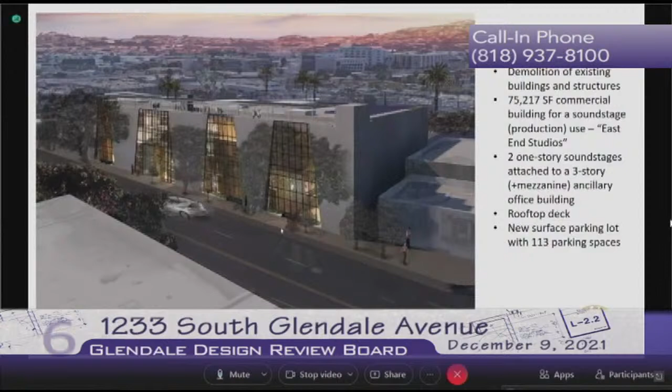Okay, can everyone see my screen? Yes. All right, good evening and thank you. This is Design Review Case Number PDR 2117731 for the project site located at 1233 South Glendale Avenue. The proposal is to demolish the existing buildings and structures on site and build an approximately 75,000 square foot commercial building for a soundstage production use. The owner's intent is to redevelop the project site to suit the needs of the existing operator, East End Studios, and to unify all of the current operations into one building.

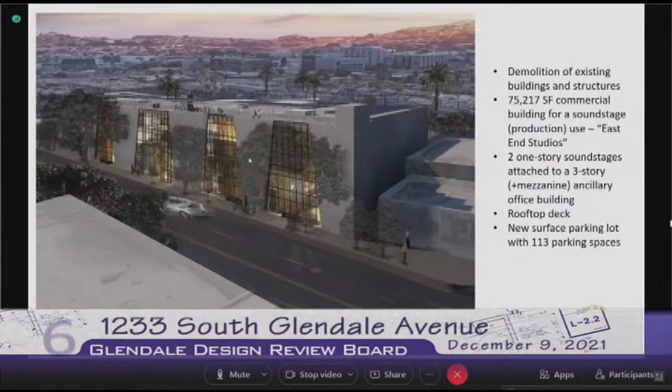The project includes 2 one-story sound stages, an attached 3-story and mezzanine ancillary office building with a rooftop deck, and a new surface parking lot with 113 parking spaces. The project site is approximately 2.2 acres with frontage on 2 streets, South Glendale Avenue and South Maryland Avenue.

The site is split zoned. The easterly half facing South Glendale is located in the C3 Height District 1 zone, and the westerly half facing South Maryland is zoned R2250 with a parking overlay.

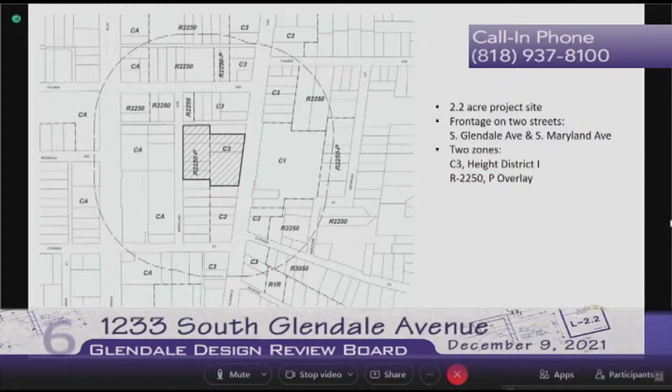East End Studios has been operating at this location since December 2020, and the site has been used as a soundstage production use with offices since 1986. Currently, there are 7 buildings on site along the westerly half that will be demolished, including 2 Craftsman-era buildings. None of the buildings are considered a historic resource. The property currently has 96 parking spaces that serve the operation, with vehicular access taken from 2 driveways along South Glendale Avenue.

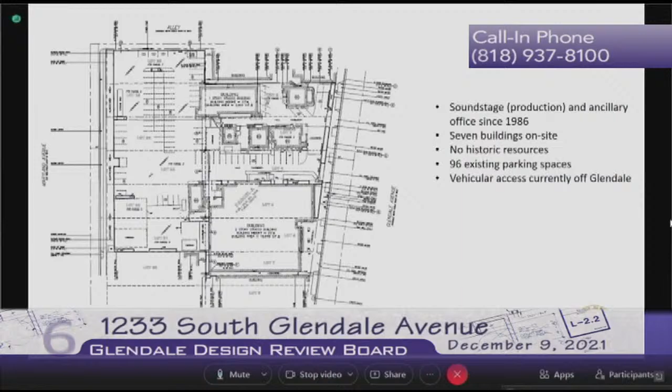By way of background, as it relates to development of this project, in September the planning hearing officer approved multiple variance requests related to the required setbacks, landscaping, required masonry wall buffers, height, and the trash collection area. They also approved a parking reduction permit to allow 113 parking spaces where 119 are required, and 2 loading spaces where 5 are required.

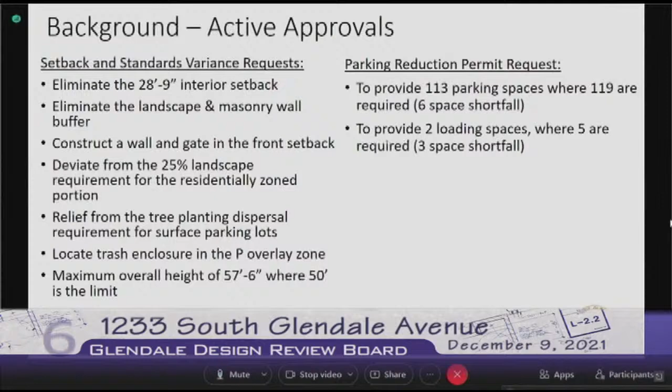The surrounding area is a mix of commercial and residential uses, with a fire station located to the north on Palmer Avenue. Directly across South Maryland and to the west, there's a vehicle inventory lot for one of the nearby dealers on the South Brand Boulevard of Cars.

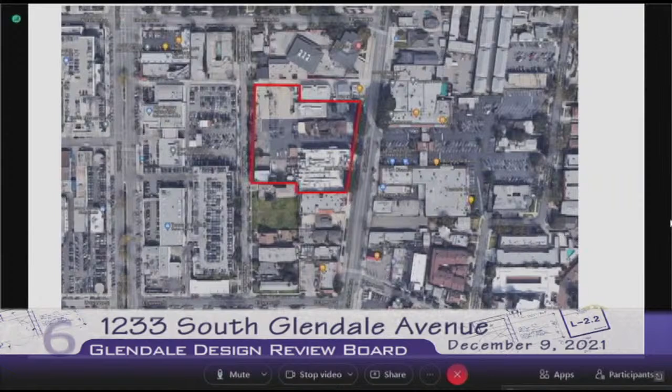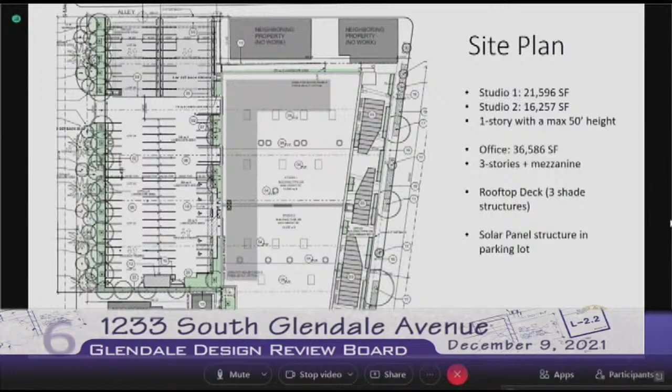The new building is sited on the commercially zoned portion of the site, with the building located at the front property line and pockets of landscape planters at the ground floor along South Glendale that will enhance the pedestrian experience.

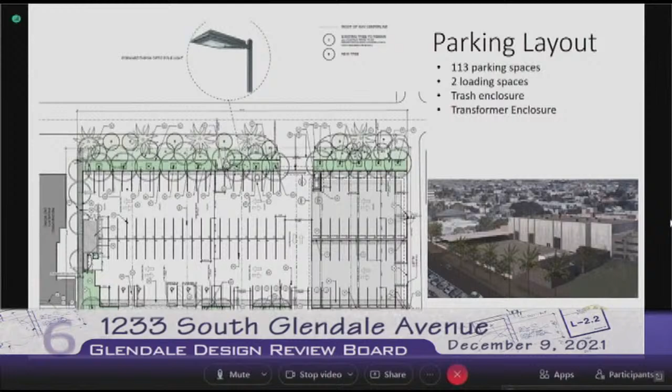The updated parking lot is proposed on the western portion of the site in the parking overlay zone and includes a solar panel structure along the northerly portion. Vehicular access to the site will be from a new driveway along South Maryland, and the existing driveways on South Glendale will be closed, which will improve the pedestrian experience as well as traffic flow along the major thoroughfare.

A rooftop deck with shade structures is also proposed on the front portion of the building oriented towards South Glendale Avenue. The intent of this area is to provide a usable open space for employees and those conducting business on site. The development also includes landscaped areas throughout, including appropriate buffers along South Maryland Avenue. The new landscaping is appropriately sized and located, and it complements the overall building design.

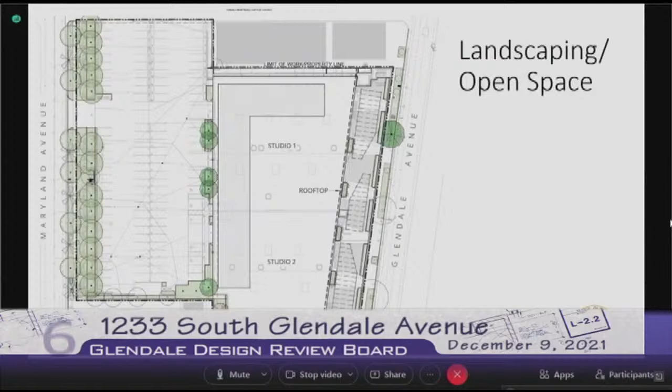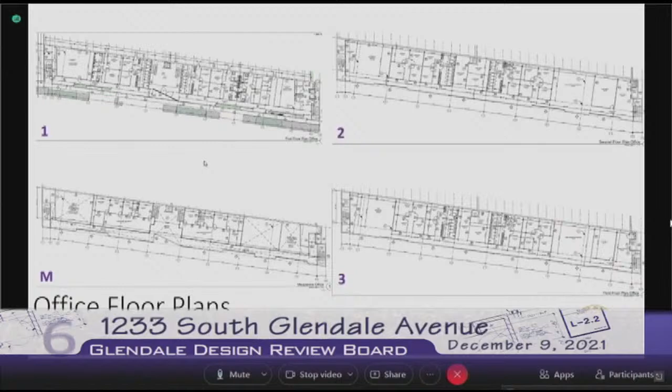Overall, the mass and scale of the design is appropriate. While the new building will be larger and taller than others in the immediate vicinity, South Glendale is quite varied in the size and setbacks of buildings in the blocks around the project site. The new building will add to this variety while also meeting the operational requirements and industry standards for production facilities.

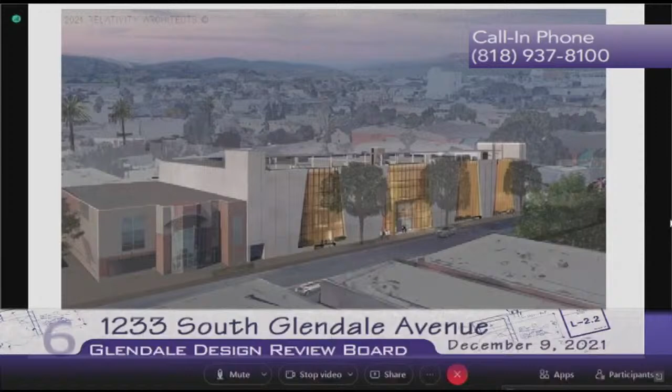At the Maryland frontage, the tall sound stages will be set back significantly from the street, and they also face primarily what are commercial automobile uses and mainly vehicle inventory storage parking.

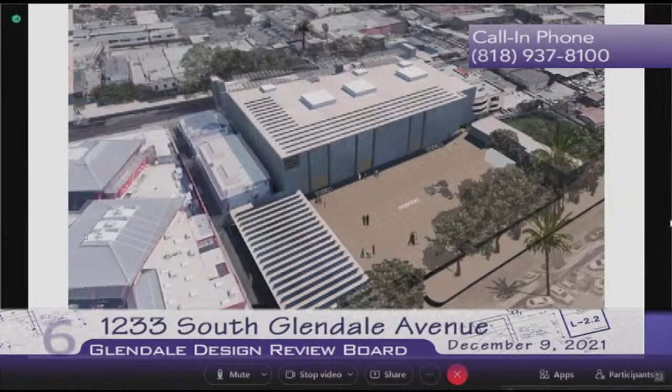The north and rear facades will be clad with fiber cement panels with a module size that will break up the mass of the wall surfaces. And at the south, the existing office building will largely screen the massing of that elevation, and that's shown in the drawing with that dashed line right there.

The Glendale Avenue facade will feature a series of small setback areas at the ground floor with built-in landscape planters and benches that help break up the building massing and provide a more human-scaled environment. The canted curtain wall elements help break up the mass, and they also provide visual interest on this frontage.

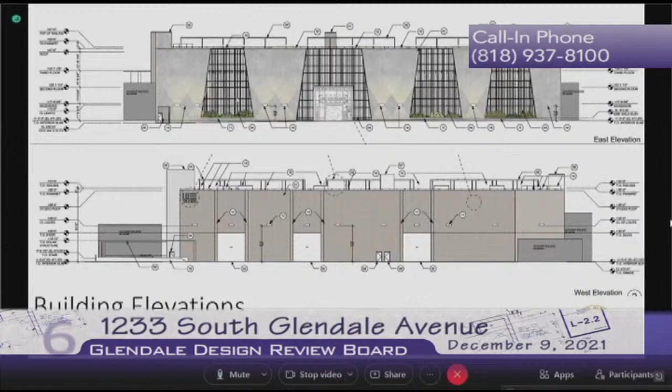This slide shows the building elevations facing both Glendale Avenue and South Maryland Avenue. Overall, the finished materials are of high quality and they reinforce the building's modern architectural concept.

The exterior finished materials consist of smooth finished concrete walls with grid patterned score lines on the South Glendale Avenue frontage, rectangular fiber cement paneling on the rear and north facade to visually break up the massing, in complementary dark and light gray colors. And the rooftop patio structures will be steel with perforated metal panels.

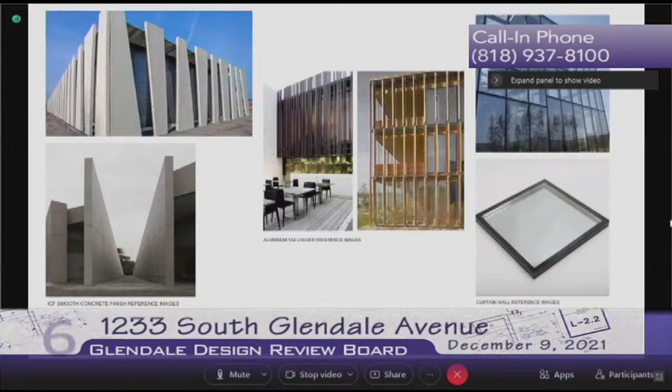The canted curtain walls, vertical louvers, and solid wedge-shaped wall sections on the Glendale facade will create a dynamic composition that will help enhance the appearance of this busy thoroughfare.

Staff has not received any public comments for this application. We are recommending approval of the project with no conditions and as proposed. That concludes my presentation, and I'm available for any questions. Thank you.

Mrs. Asadi, can you explain, and maybe this is a question for the applicant, but what's the mode of egress from the parking into the office building? Or is the office use only going to be used in conjunction with the studio, with the stages? This use will only be used in conjunction with the studio.

The applicant, as well as the owner, is here. He is the applicant as well as his project team, and they can clarify that probably better than I could. Okay, any other board members have questions for the applicant? For the staff?

Okay, let's go ahead and ask the applicant to make their presentation. Was there another question before? No, I was just going to comment and say most of my questions are probably better related being addressed by the applicant.

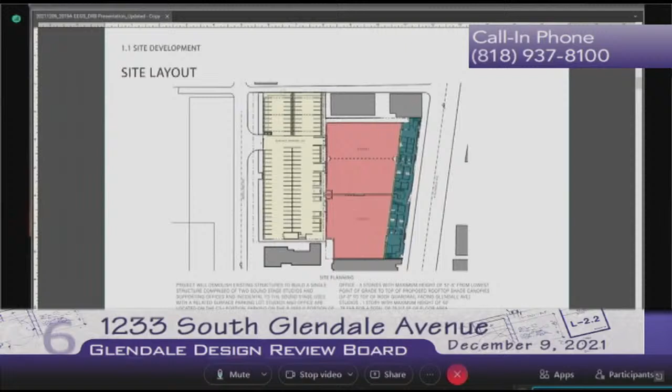The project itself, I think Vista pretty much clarified it. It is a motion picture studio. It does cover both sites, primarily because of the zoning and it being a split lot. We moved the building to the front side along Glendale and the parking to the rear along Maryland. That has proven to be a really great decision because it will keep quite a bit of vehicular traffic from turning from Glendale onto the property, providing most of it to go around the back, which is wonderful for the property and for the thoroughfare of Glendale itself, which is quite busy. Currently there's a driveway in, and I know that has caused problems in the past. You can go to the next one.

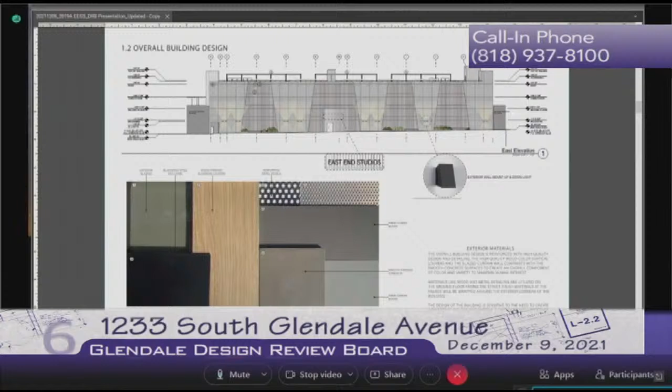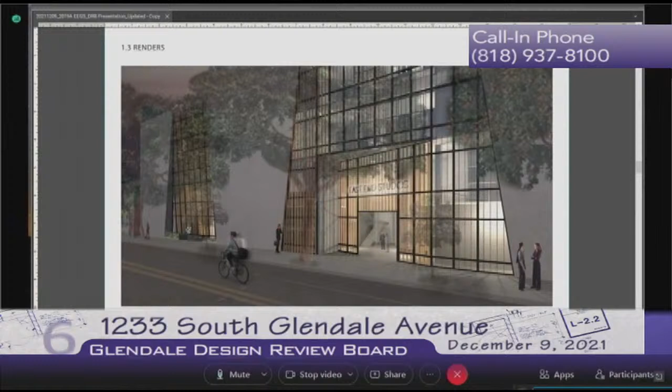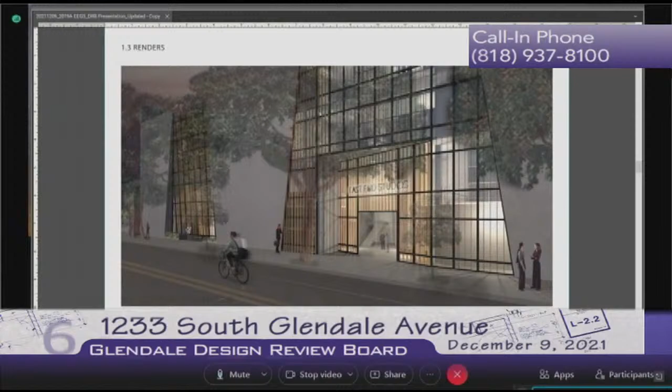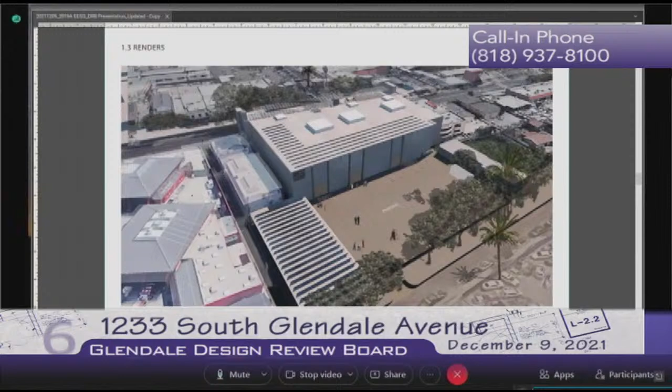As with any project of studio scale, parking is very important. Fitting the Tetris puzzle of getting all the parking to work was difficult, but we feel wonderful about what we've accomplished. We've also established solar for the project, which Relativity is very proud of, and I know the client is too, being able to use a renewable source of energy, especially given the direction California is pushing. These buildings are very difficult to include that in, so we were really happy to get as much as we could on the project.

The majority of the in and out will be taking place from the parking lot. There is both internal circulation as well as an external walkway leading to the front office of the building. But in truth, the use of the building is entirely insular. There will be no other use other than what supports the soundstage itself. No one's moving in as a permanent office on the ground floor with a different use or focus than support of filming or shooting in that production space.

Yeah, that is correct. And that's pretty much it. We're really proud of the project, and I appreciate Shep's direction. This is probably one of the best projects our office has come up with in a while. We've had other production companies take a look, and they're really excited about this building because it takes a studio to a different level. It's not just a big blank box, it's got some really nice articulation and visibility. We're really proud of it and proud to put it in Glendale.

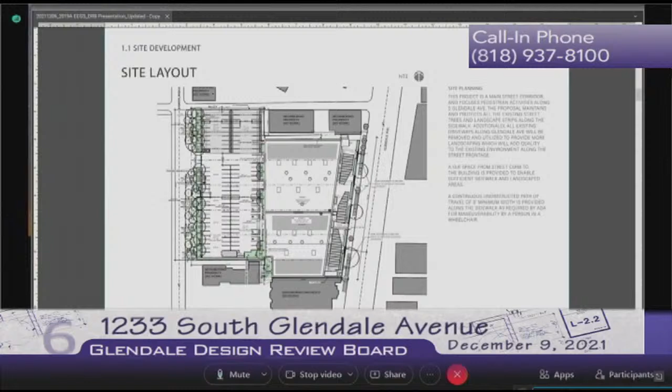Thank you. Does that conclude the applicant's presentation? Yes, it does.

Very good. Board Member Simoni, you wanted to raise some questions? Thank you, Chair. I have a few questions, and we'll start with the storefront details. I'm wondering if the design team or architect could hone in on the details of the storefront system as it relates to the material board.

Sure. Did you want us to share a screen and look a little closer at it, or talk about it? If staff is able to allow you to share your screen, I think that would be most helpful. Can you see what's up right now? Yes. So it is your typical setup. We intend to use Arcadia, a highly qualified storefront glazing system. It's broken up into larger and smaller panels. It's your typical 2-inch by 4-inch system with the glazing internally.

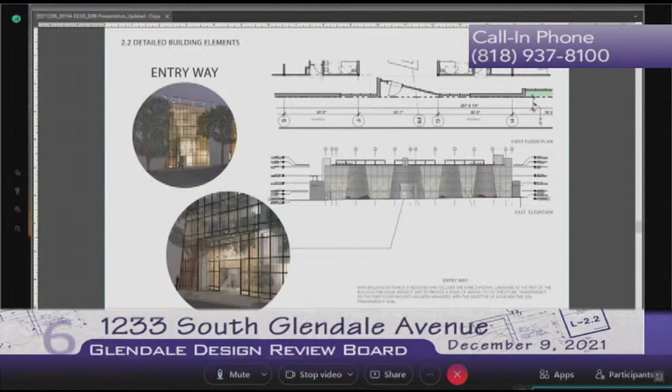What's important to understand is that both the entryway and the adjacent glazing that is not an entryway push back into the building, allowing about a 4-foot cavity at the facade, so that at pedestrian level you're not overwhelmed by the size of the building. It allows you to engage with the building, and we've actually designed a bench to sit there at staff's recommendation.

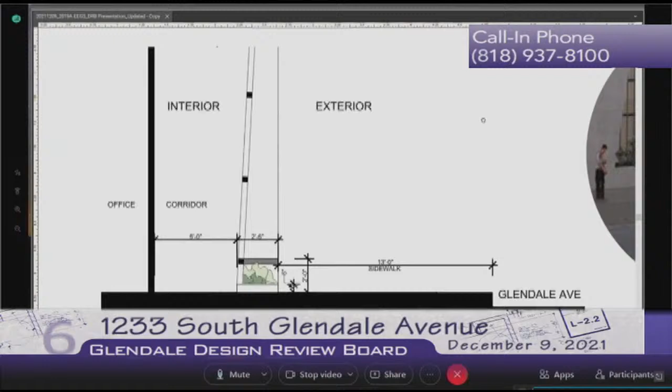Yeah, can you keep zooming in there? It's hard to see the detail because of the size of the building. Let's see. You can see we've got a sidewalk, and the glazing is canted in to allow for a 30-inch bench. There's actually an active corridor on the other side, so as a pedestrian could be walking on the sidewalk, someone could be walking down the corridor, and it projects the facade of the building back further so it doesn't loom overhead.

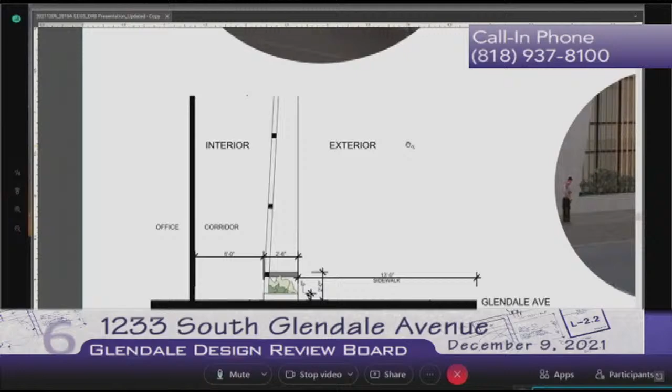If you don't mind scrolling up to the other picture and zooming in, maybe through this or the material board, I think it's important to note that we're combining materials here to soften it, so you have the glazing, which is the glass, and then the mullions, which will be in black steel or black aluminum.

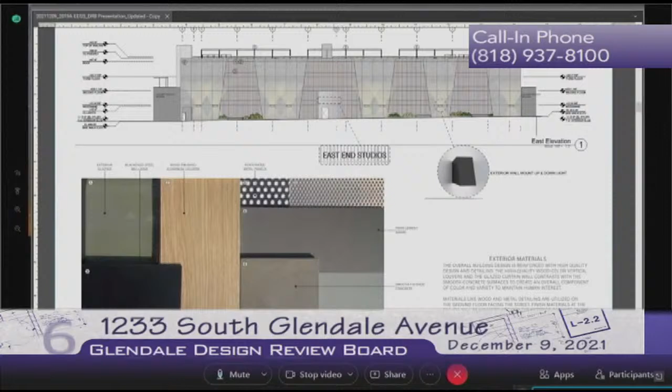But then we have these vertical wood slats, which break up the material and go up and down the building, to create a really nice design that breaks up the glass. So you have these vertical wooden slats, which are wood-finished aluminum louvers, versus the black, and they're kind of going in opposing directions.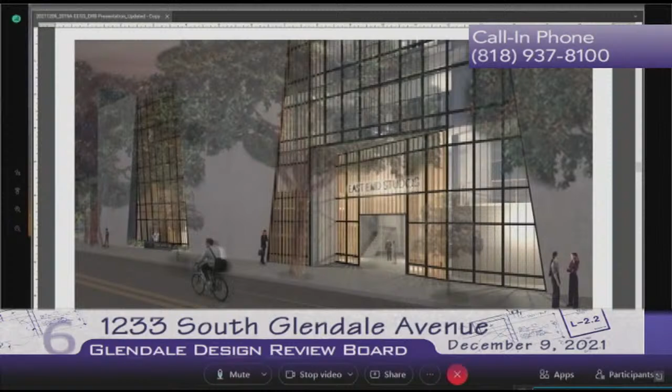And that was where I was kind of honing in on. So thank you for adding that additional color. Are those, it seems as though in what's being depicted on the screen at the moment, the vertical aluminum fins - let's say wood veneer, aluminum covered with a wood veneer material - how are they attached? In other words, how do they adhere to the storefront system?

Are they attached to the aluminum structure? Yes, they're internal, attached to the aluminum structure on the inside. I see, so they're clipped on in a way to the horizontal and vertical storefront aluminum system from the inside. That's correct. They add a modicum of privacy, and they warm the facade so it's not just glass, concrete, and black. They give a warmth to the facade.

And do you envision those being cut and inserted between the horizontal pieces, or do they run at length? They run at length - we don't anticipate putting in all those individual pieces, that would take forever. No, we see them running at length. The clips will be attached to the mullions, but the aluminum will be an extruded fin, as it were, with a wood finish that runs the length of the window, the glazing, top to bottom.

Thank you for that clarification. The second question I had is, looking through the package, I was trying to find an overall site section that takes me from, say, Glendale all the way to Maryland, but I couldn't find such a section. Does it exist in the package someplace? I'm not sure, I will have to look through. I don't believe so. Luis, Jenna, did we cut a section from Glendale to Maryland?

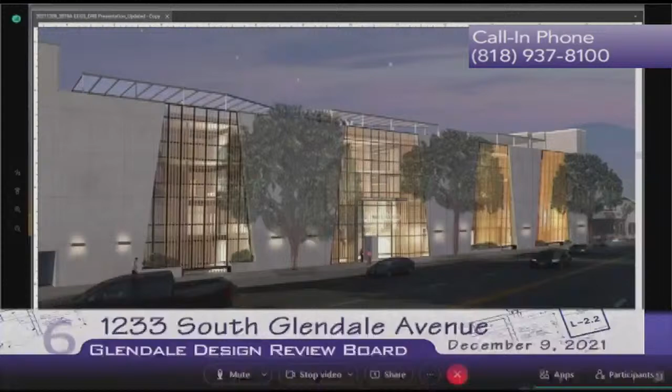So if I'm coming from the parking lot and I'm trying to enter the studios, where you have the arrows, are those where the entry doors are - the big elephant doors? Yeah, correct. So we will have three elephant doors where you can enter directly into the stages themselves from the parking lot.

And then on the northern side of the building, we have a walkway, which is an access point, so that in the event they were actually shooting a production and you needed to get to your office, that would be your primary method of getting into your office. So you go in there and enter the building on a side door from the parking lot. We also obviously have a front entrance for ride share or people who are coming.

Right, bicycles too. So if you Ubered or whatever to work, you could get out and walk right in - there'll be a reception on Glendale Avenue.

And I guess sheet 210 depicts the connection of the offices to the studios. And so there's really no corridor between those two uses - in a sense, those doors open into an internal corridor of the office space. Is that right? That's correct.

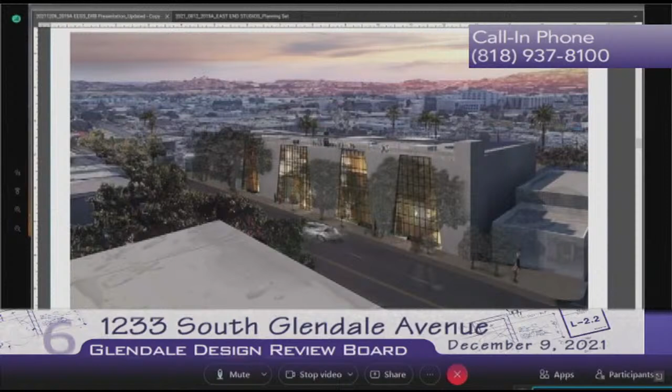The other question I had was about the landscape buffer system. When we look at the overall rendering, that's more in the beginning of the package. Would it be the front facade? No, I'm more concentrating on the back for now, the A023 sheet. Yeah, and there's another one as well, but that one's not accurate either. I would go to the actual site plan because that shows where we're actually doing the landscaping. That's what I'm getting at, and the rendering doesn't show it.

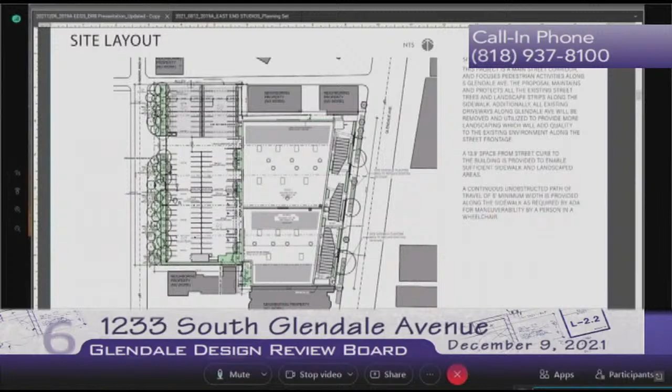How are we buffering this very tall building from Maryland, and how is landscaping integrated into that scheme?

So we have the whole edge along Maryland currently landscaped, but we anticipate adding more trees and hedges. The reality of a studio is we prefer not to have a lot of interaction with someone who's not working there. Privacy is of great concern for content creation these days, so it behooves us to add a natural buffer along Maryland to give some sense of privacy to our property as well as to Maryland, so that the busyness of the parking lot or the studios themselves doesn't pour over into each other.

So you can see it's a lot of circles—those are either newly planted or existing trees. There is a very strong buffer of landscape between the property and Maryland. In addition, the building is set back 150 feet from Maryland, so it's not hovering over it. If you take the hypotenuse of that triangle, the building ends up feeling like it's something like 30 feet tall from that distance. It doesn't loom over the site.

And to add to that, we are providing 20 new trees with at least 25-foot tall canopies along Maryland. That was a question as well—what size specimens? The ones along Maryland are fully grown 25-foot specimens. That's correct.

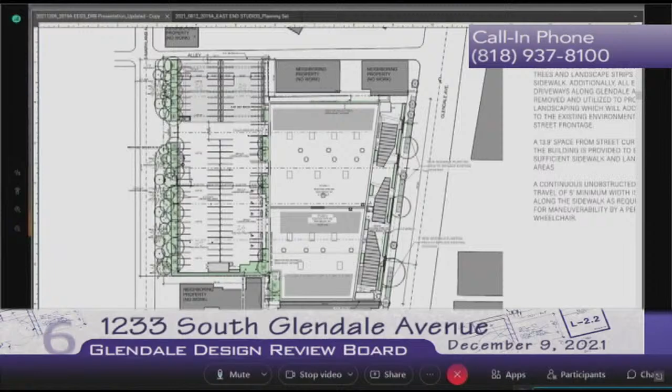And the glass facade as it approaches Glendale - the renderings really show it well lit up. Will it be lit up at night? I mean, the soundstage is pretty much a daytime operation, not so much nighttime.

But will the lighting be there? Well, we can't dictate when a potential tenant will be operating, but we will have exterior lighting on the building, which will light the sidewalk 24 hours a day. As far as what happens behind the scenes, it really just depends on what production they're filming at that particular time - sometimes they'll work long hours, sometimes they'll be out at 5 o'clock. But in general, in this industry, there will always be someone there working.

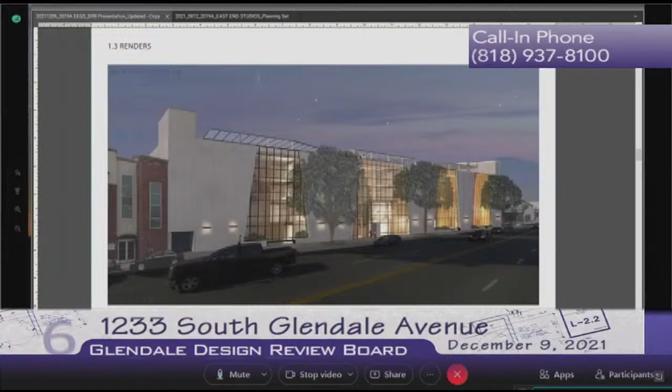And we do have Title 24 concerns - we're not allowed to necessarily keep a building lit all night long. We have limitations about what the allowance is. I would hazard a guess that along with the lighting on the facade of the building, the lobby would be consistently lit - perhaps not the offices on the second and third floor.

I asked because it's a very narrow sidewalk, and the tree cover that's there is pretty pervasive, so it could have a tendency to be quite dark.

Any other questions? Go ahead, Mr. Simoni. I think Mr. Mina's had his hand up first. Oh, okay, I can't see him on my screen.

Sorry, thank you Mr. Chair, and thank you for the staff report. Going back to the facade of the building and having so much glass in an inclined manner, you're compromising - again, I'm not an architect, but I'm an engineer - that's compromising a lot of shear walls along the front. Again, it might be a building and safety issue, but do you think this tall of a glass in an inclined manner...

...be safe during a strong ground motion earthquake? I mean, I'm sure it was addressed by the structural engineer, but having so much glass, you're compromising the highly needed shear walls for this part of the country.

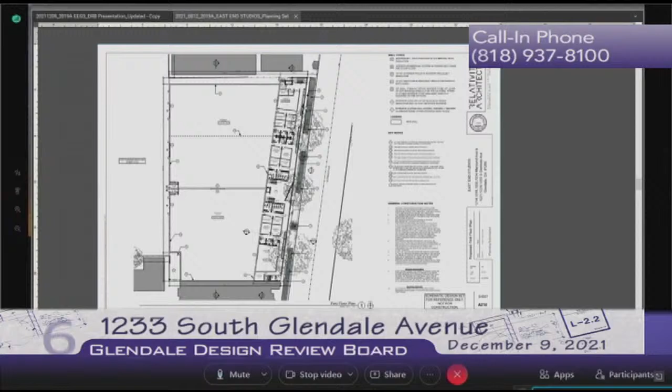There's a nice diagram that depicts a pre-finished Logix concrete wall system. The architect did mention that the sound stages were going to be poured in place concrete. I'm wondering, is this poured in place concrete? Is that what we're talking about? Now you're asking questions that I'm going to love to answer.

The building is constructed of a material called an ICF block, an insulated concrete form. It's a different way of using poured in place concrete. Instead of hiring carpenters to build formwork that gets used and thrown away, there's a company that produces styrofoam blocks. They get stacked like Legos, and they're pre-built to hold rebar, so the rebar lays in both horizontally and vertically.

You pour it in 8-foot lifts, and the recycled styrofoam adds a level of temperature and sound mitigation for the building naturally. In addition, the styrofoam is designed to have a plastic reinforcement every 16 inches on center, equal to a 2x4 stud.

So we're able to put sleepers on the exterior wall and then mount our finished cementitious panel on the outside. On the inside, not a lot of finish is required, so we basically screw our insul quilt, the sound mitigation insulation, directly to the styrofoam. It makes a wonderful building section: rain screen, cementitious panel, sleeper, 2 inches of styrofoam, 12 inches of concrete, 2 inches of styrofoam, and then the insulated blanket.

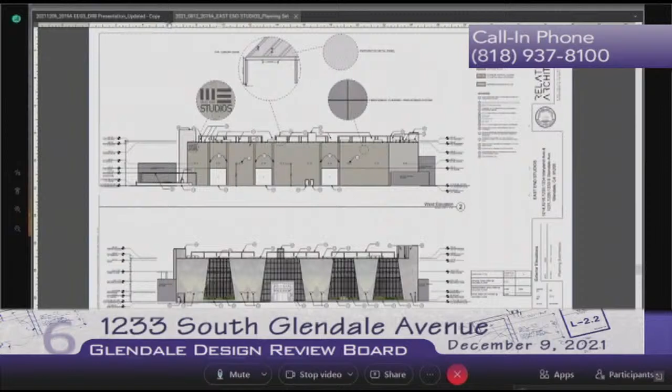Oh, those are the towers, the towers. Is that right? Is that what you're indicating? There's an opportunity to create end pieces, to frame it, to have maybe a different finish. But I was wondering what your thoughts are on that.

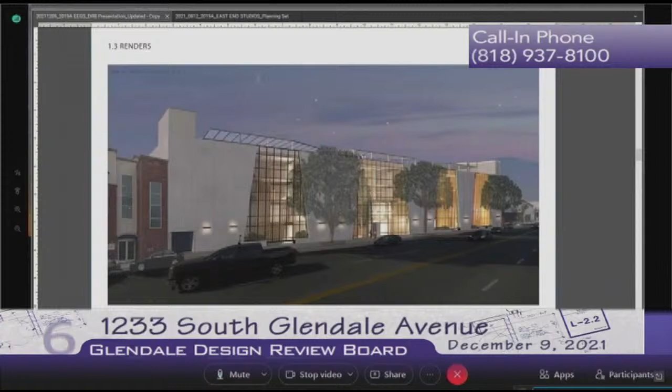I mean, I feel like I'm a bit of a purist when it comes to concrete, and hanging or attaching things or shifting the material, I feel, would in this case take away from the massing of the building and the gentle articulation of the angles. Those end pieces are staircase towers, obviously, as we've understood, and an elevator, so they are functional to some degree. I think highlighting them might not blend with the consistency we have on the rest of the structure.

The concrete panels on the facade are sand-finished plaster over the top, so we're putting a finish over that concrete to get something of a, maybe a Tadao Ando kind of soft feel to the concrete, which is not always achievable, but I believe because of our angles and the type of mixture we're going to provide, we're going to get that. So I think dressing up those two little corner elements would detract from the clean uniformity of the concrete we've provided.

That's the architectural intent. I think primarily, if anything, we're trying to just keep it somewhat uniform and not necessarily draw the eye to those areas, as opposed to what we think are the more creative aspects of the front of the building, which really revolve around the glass storefronts and the play between the glass storefronts and those vertical louvers.

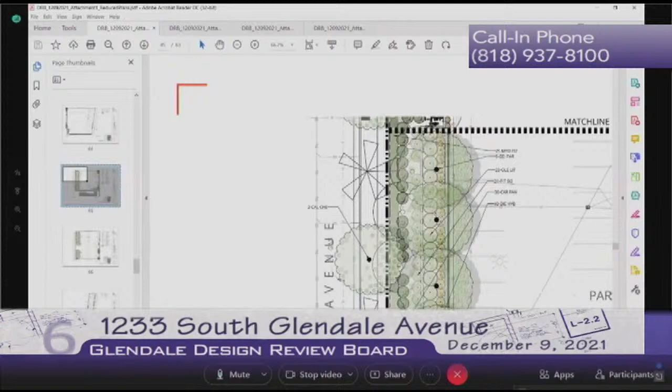Sorry, I don't normally use this computer, so just bear with me.

So this is the area in question, I believe, and I think it looks like a single family, but I think it's like a 2 or 3 unit building. From what I remember, I believe there's a unit up here, and below is a garage. This area here has existing trees that will remain. I believe the wall here will be about 6 feet tall and a solid CMU wall in this area.

And then I believe these are going to be rosemary bushes. I think we can get taller landscaping in there. I am concerned about increasing the size of the planter and the impact that could have on both the transformer, the easement, as well as the parking.

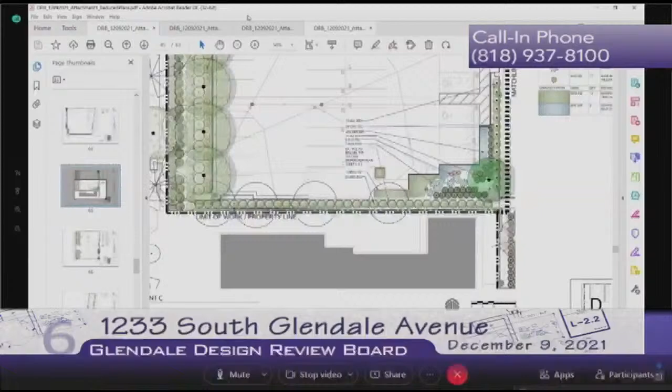Well, thank you for that additional detail. For starters, rosemary is not the appropriate material there for screening. I would not suggest a ficus or anything like that because it's intrusive. However, something like a ligustrum, you could certainly get 14 feet out of a ligustrum bush, and that's not going to take a lot of room. So if there are ligustrums spaced 2 feet on center, adequately spaced, that would get some height, or some other hedge-like specimen that the landscape team comes up with. But those are things that, as Mr. Platt brought up, to work with the design studio team to see what's a logical solution without going through a ton of heartache here.

Okay, yeah, no, that's fine. I just wanted to make sure I understood too. So thank you very much.

I'd like to make a motion, Mr. Chair, if that's all right. I move to approve the project with 2 conditions. Condition number 1: staff to work with the architectural and landscape team to create an appropriate buffer via suitable landscaping to provide a buffer between the parking lot and the existing single-family residence, which could also integrate an appropriate CMU fence, etc. The second condition would be for the design team to provide several quick sketches regarding the corner elements of the Glendale facade, and to collaborate with staff to see if there's a better solution.

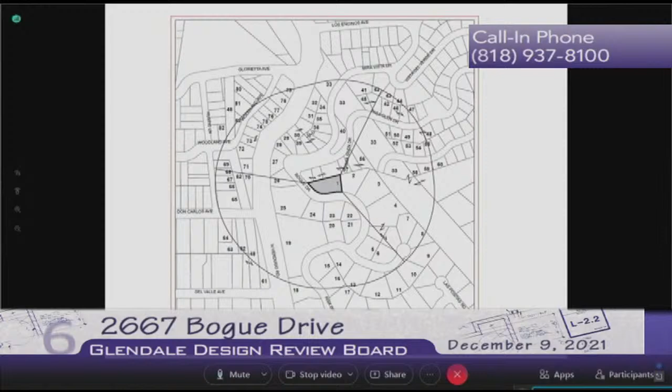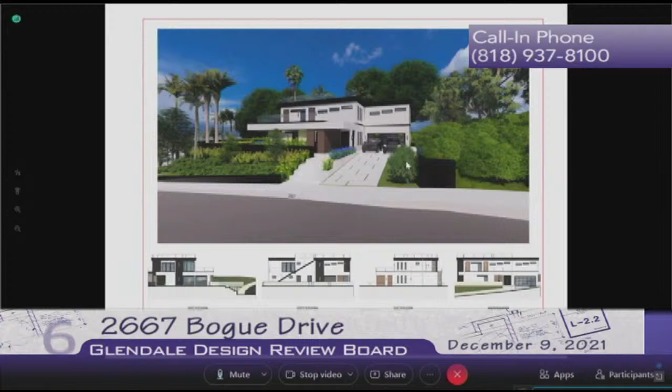Looking at the perspective of the proposal, this is a rendering. We'll go more in detail in a little bit. So the driveway location will be the same, leading to a two-car garage attached to the house. The property will be developed around it. The landscaping on the slope will be updated. There are some elevations shown at the bottom. We'll get to those in a moment on a larger scale drawing.

Here's the site plan. The property starts sloping up, then it levels out. There's another slope to the back here, leading to the neighboring property to the north. The oak trees are located on the property to the north. There are 3 of them.

The applicant has submitted an arborist report. The arborist report supports the project in terms of preservation of oak trees. The forestry division has also reviewed that report and concurs with the determination.

Moving on, this is a more detailed site plan showing also the footprint of the building, the footprint of the first story, and the footprint of the second story.

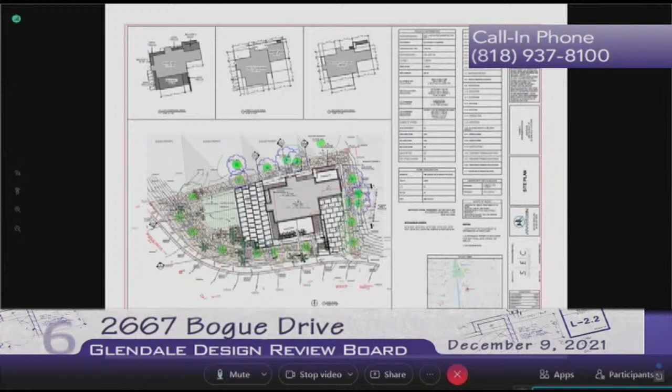Coming to the elevations, below is the front elevation of the house facing Bogue Drive. As you know, Bogue Drive curves around, so this is the long front elevation leading to the garage, 2 levels. There's going to be an outdoor balcony or porch. The roof of the front will be used as the balcony or deck of the second level. There are other deck levels that I'll point out, one of which is the rooftop.

This is the rear elevation. Rooftop deck is shown with a glass parapet here. The other elevations, the other 2 elevations, below is the elevation facing Bogue Drive towards the west. And the upper elevation is the elevation facing the property to the east.

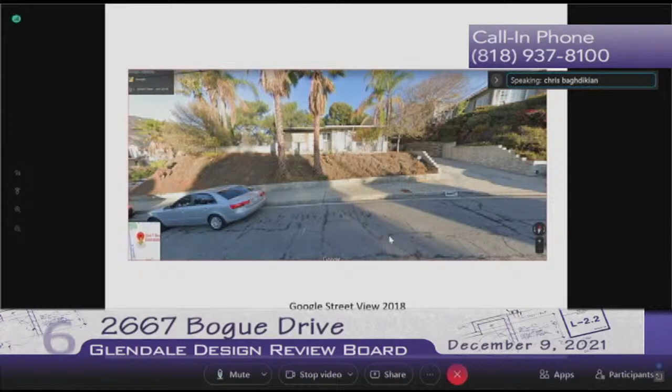The requirement of the sidewalk is beyond the authority of the Design Review Board. However, what results from the sidewalk design is well within the jurisdiction of the Design Review Board. So this is a comment that we had and conditioned in the staff report.

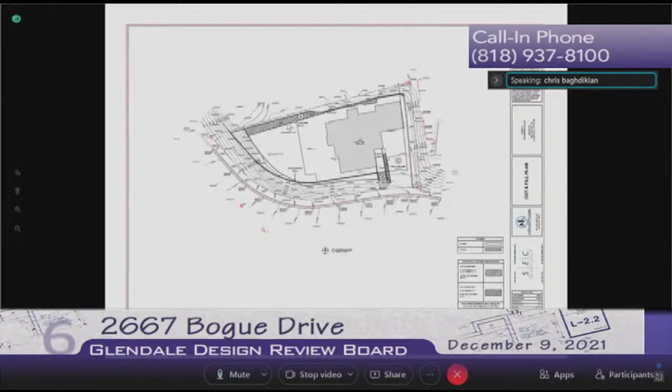Another comment regarding the site planning is what is shown in the grading plan attached to the plans. The grading plan indicates that the back portion of the property will be graded into the hillside and the slope will be cut. But if we look at the site plan, there's no indication of that cut. So there's a conflict or ambiguity between the two plans.

The site plan here shows there's an existing low retaining wall here, and the site plan indicates that it will remain in this location.

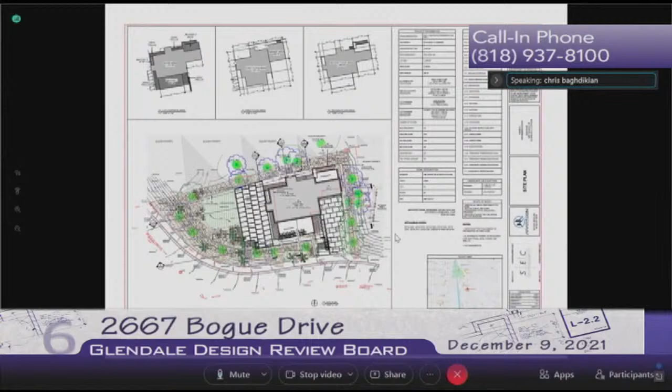Moving on to the building mass and scale. Looking at the building mass, there are a number of areas where it appears bulky and boxy. For instance, there are large two-story dark volumes proposed - one here, and another in the front; one on the side here, and another one. So these two building volumes - actually one here and one in the back portion of the building. These building volumes, together with the single flat level roof, contribute to the building mass, in addition to the volumes over the garage and this area.

The dark masses, for instance, incorporate bathrooms or a pantry. Staff is thinking that the roof level can be lowered there and create a relief in the building mass.

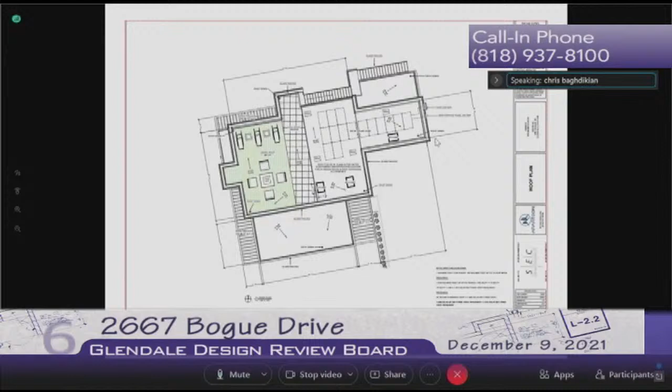Having said this, let me go back to the roof plan here. The roof plan, for instance, indicates a glass parapet around the entire building. Look at the elevations or the cross section.

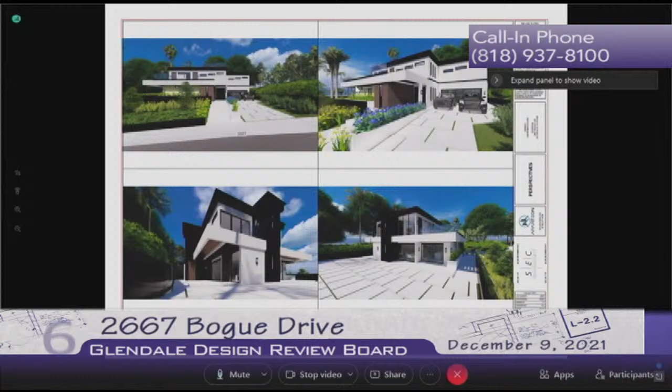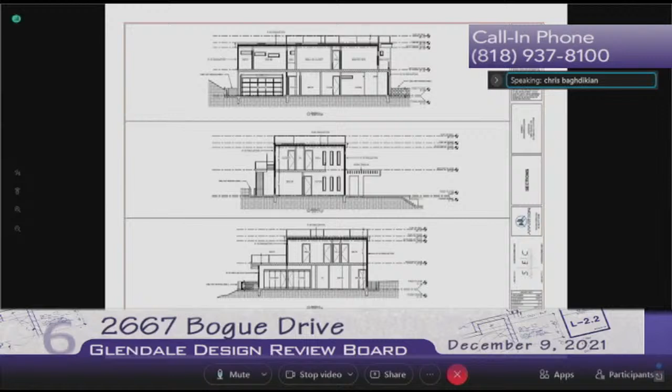So this is part of what the applicant has provided in terms of view or privacy review and the views available from the roof deck. The entire roof deck is not available for use. Privacy issues can change, so it's not readily identifiable as to what privacy issues the roof deck will result in.

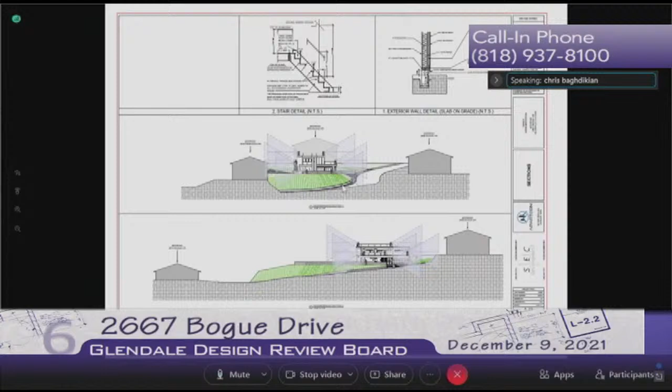Continuing with the staff report and coming to the design and detailing of the building, the building masses are accentuated by the dark, almost black finish of these vertical elements and the stark or contrasting white masses of the two-story building volumes, the plastered volumes.

Staff's direction is to soften these instead of being very conspicuous, in terms of design, to be more consistent with our design guidelines that recommend blending with the hillside. So these harsh color contrasts can be softened by lightening up the dark or black stone veneers and using a more earth tone instead of the white stucco.

And we have a comment also regarding the windows. As you can see, there are windows here that are picture windows on this facade and this facade. But when you look at the front facade of the building, especially the second story with these narrow windows, the language changes. The fenestration pattern changes.

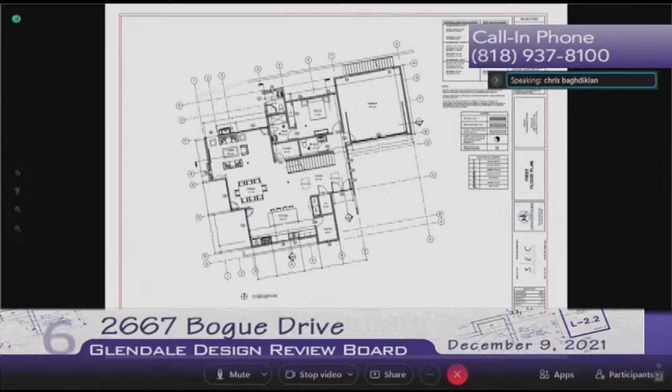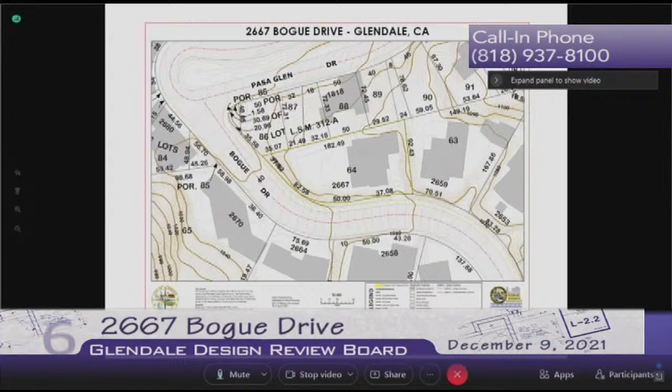Having said this, I'd like to get to the staff recommendation, which is for return for redesign with a number of conditions. The conditions relate to what I've been mentioning all along, primarily to the building massing, to soften the building mass more consistent with the design guidelines, along with softening the color palette and material palette. The first condition is to modify building mass to reduce the boxy character, involving stepping back the second story, modifying the tall black masses, and modifying the straight trellis by breaking it up.

The second condition is to step the building with the topography by pulling back the projecting deck over the first story. The balcony or deck over the first story, accessible from the second story bedroom, projects beyond or more towards the street than the ground floor. Staff's recommendation is that this deck be pulled back.

Condition 3 is to restudy the facade and redistribute the cladding materials, intended to soften up the building mass with the finished materials. Condition 4 is to use a more muted color palette, again with the direction to soften the building massing.

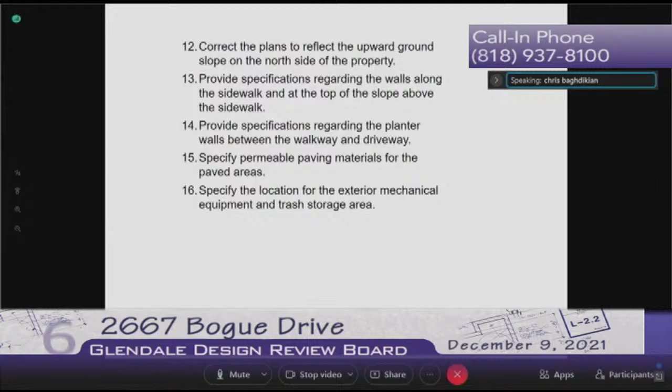Good evening, Chair Welsh, Board Member Simonian, and Board Member Minas. Thank you for considering our project today.

Given that this project has a little bit of history and a little bit of complexity, I'm kindly requesting that I have a little extra time for my portion. I know I get 5 minutes and the applicant gets 5 minutes, so maybe I'll end up using the entire 10 minutes and the applicant or the owner will speak for only a few minutes, if that's okay.

Because, unfortunately, throughout the process, the only feedback... this is an ongoing project for almost 3 years, a year and a half with the previous designer, and it was turned over to me a year and a half ago. I don't want to speak about the previous one because obviously they didn't get anywhere, that's why they came to me.

We spent a year and a half since, I believe, the initial submittal package to the case planner happened in October 2020. The conversation between Chris and I started in July. Since October 2020, we've been following up constantly to get feedback on which direction we're going, and the only feedback we've received were preliminary comments that were very technical, like this section isn't very accurate, update the arborist report.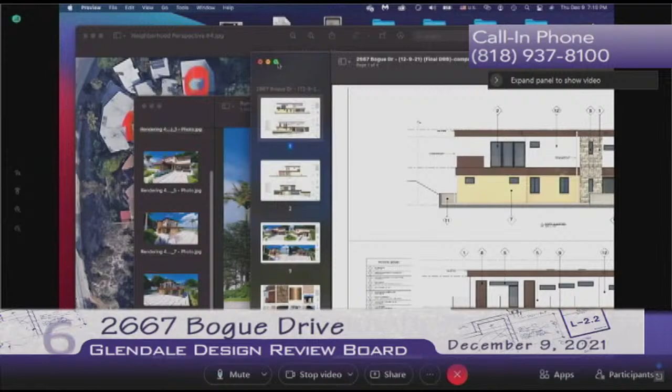So these are the new elevations. We've introduced stone here in the backside. There's some stucco, there's some wood siding. This is the backside. The front, we have... let me grab the sheet.

We have stucco in this area, we have stone cladding in this area. This whole area here, it's not stucco anymore. It's some kind of natural stone that's more like towards the beige color. You guys will see it in the renderings.

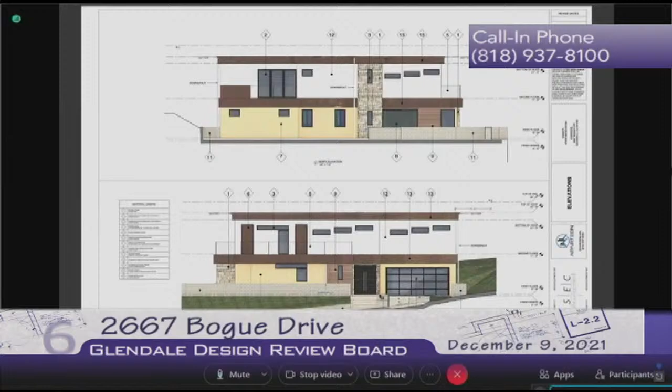And this volume here that sits on top of the garage got shifted to the back. Now you'll see it in the perspectives. This is the side, again, more stone cladding.

We broke down the mass. Roof deck is completely eliminated. The proposal was only for a portion of it, away from the neighbors, to be the roof deck, but we completely took it out. We took out the stairs. This is the deck on this—no, that's from the side. Okay, you'll see it on the elevation.

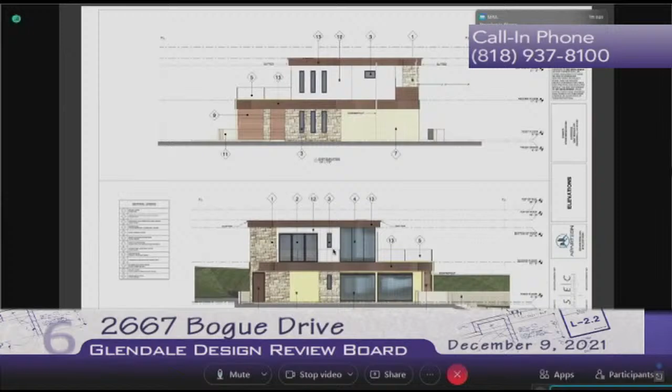Over here, this is the area where you had that big black tile volume that goes up. We eliminated the second part here, so that's gone. We went with stone, went with a different material here, and this got pushed back, which reduced the square footage by a few feet. There was a bathroom here, we shifted it into another space.

These are some of the perspectives—some of the revised perspectives, so you guys can see. This is the area where that black tower was going across all the way, so that's gone. It's not there anymore.

Can you zoom in on each one of your renderings so we get a better sense of it?

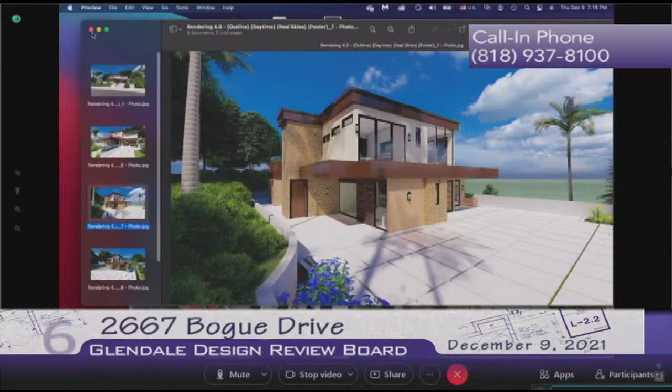So that's that. I'd like to share one more thing. This is the property, and this is the area I'm talking about—the only opposing neighbor.

These same people signed a petition in support, and then later sent a letter about the deck. The deck was eliminated, and the balcony that concerned them was eliminated, or cut in half and given a planter, so there are no issues there.

This signed the petition, this signed the petition, this signed the petition—repeated for several neighbors. This guy wasn't home when the petitions were collected, and I think this person wasn't home either.

So it was this neighbor, and you can see from this Google image the canopy I'm talking about. If you go to that area, it's pitch dark because of all the trees. It has nothing to do with where we're at—it sits much lower and is set back quite a bit.

Okay, I see Vilya calling time here, so I think we can wrap it up. But I do want to give the board members an opportunity, since you're presenting something new here—we probably have questions.

Okay, yes, hello. The applicant indicated he would like to make a presentation of plans addressing staff's comments, and I was not privy to the timeline or interactions between the case planner and the applicant, so apologies, I cannot speak to that.